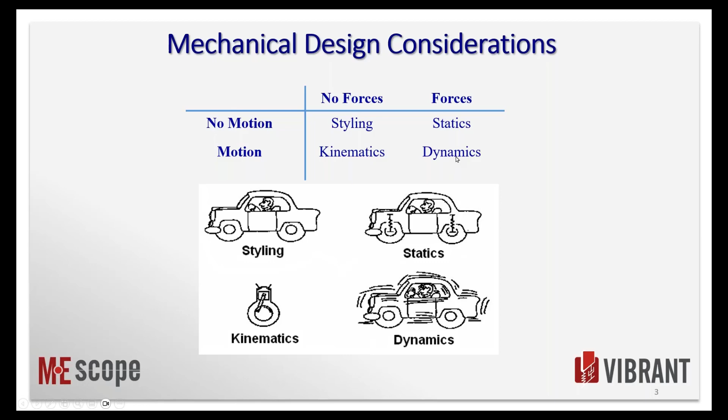Now, some of you might be familiar with FEA, finite element analysis. A lot of that work is done just with statics, putting static loads on a structure to see if it exceeds the elastic limits of the materials. And FEA is used - once you have an FEA model, you can solve for the modes of vibration, the dynamics of the structure, and you can simulate things and so forth.

So why is vibration analysis needed? A little bit of motivation here. The first three are more associated with what we call test and measurement, or product development, or installing new equipment or machinery in a plant. But uncomfortable to ride in certainly applies to cars and airplanes and tanks and other things. But if there's humans involved, then vibration may be excessive during the operation of the automobile, too difficult to control - again, a human being involved - or too noisy. And human beings don't like lots of noise, especially females.

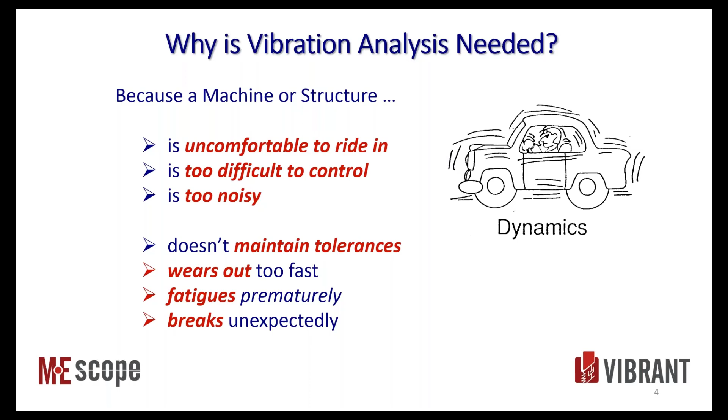The lower reasons are more associated with plant maintenance, and maybe many of you have jobs in the plant maintenance department of your company, and so your concern is more with maintaining tolerances if it's a machine shop, parts wearing out too fast, or fatiguing prematurely, or breaking unexpectedly. So those are all mechanical issues that can be amplified or exacerbated by vibration.

So what good is ODS analysis? MEscope from day one has been designed to show ODS data in animation with slow motion and amplified magnitude, so we can see what's going on. So once we get an animated picture of an ODS, we can, at least intuitively from the picture - our minds are very good at pattern recognition, not so good at computing numbers.

But when we take the numbers of an ODS and display them on a 3D model, or in this case, we're going to look at animations right on a video, on frames of a video. So how much is the machine moving? Where is it moving the most? What is the relative motion of one point relative to others. Now there we talk about phases.

So an ODS has phase in it, and that's often an important property of a machine to diagnose machine faults. If there's a difference in phase between the motor and a pump, that is often used by machine analysts to diagnose the problem. Maybe it's a coupling problem, maybe it's a soft foot - various problems that are associated with operating equipment in a factory.

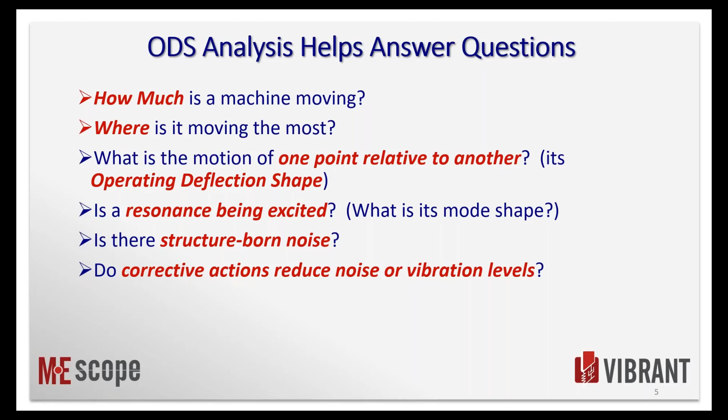Any structure with mass and elasticity will vibrate. This is the assumption behind FEA and Newton's second law, where we write differential equations that F equals ma, and the F part is what's called the restoring forces, the elasticity, the stiffness of the material, wanting to return to its non-vibrational position.

So we have to have forces in order to cause vibration. We may not be able to measure them, but with a machine we can't. It's distributed. We don't know where the forces are coming from. In a modal test, we typically create the forces either with impacting or a shaker, so we can measure the force and then measure the response and proceed with the calculation of that kind of data.

These last 2 are things that I've learned over the years that many people don't quite understand. All resonances are excited at all frequencies, and we have a couple of application notes that illustrate that. It depends on the mode shapes, it depends on where the forces are applied to the structure or the machine, and therefore, depending on the mode shape of a natural frequency resonance, it may participate in the vibration. So the last one: all vibration is the summation of mode shapes. When we get near a resonance, it tends to dominate the vibration, but again, it depends on the mode shape.

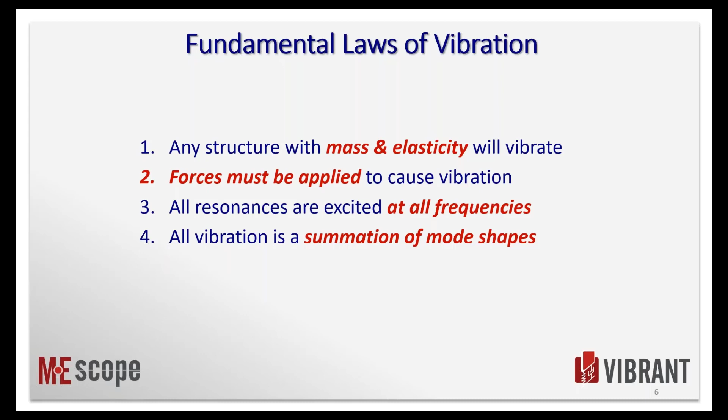So why use a cell phone? Everyone has a cell phone in their pocket, and a cell phone is a low cost and non-contacting measurement device. As opposed to an FFT analyzer or data acquisition boards in your computer or a multi-channel system, those are typically more expensive. With accelerometers and wires, now we're getting into many companies offering wireless accelerometers, still quite expensive compared to getting a picture like this of a machine from your cell phone.

And you can see there's a lot of phase here. The motor and the shroud over the belt, they're vibrating with a phase difference, and we can look at that. We can extract that directly from the time waveforms, and we'll look at that when we get into it.

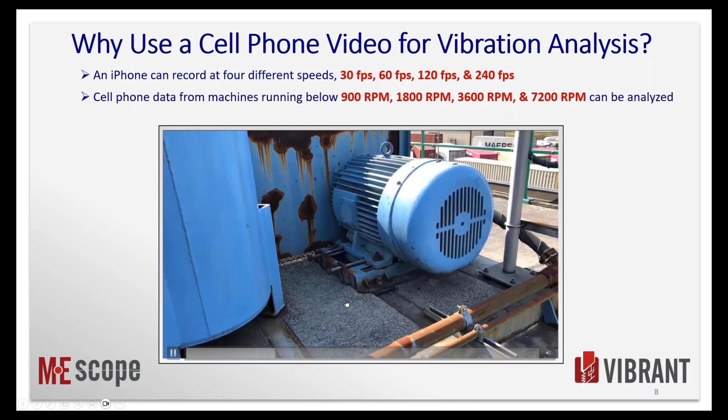Here's another picture. So if you're just called out as a troubleshooter into the field or the factory and somebody says this machine is just not behaving properly, well, a picture's worth 1,000 words. There's an amplified picture of what's going on with that motor, and it looks like the base of it is perhaps what we call soft foot. The base is just moving around quite a bit. Again, all these videos were taken with a cell phone.

Here's another advantage. Cell phone video can be recorded in a dark place. So many times in a factory, the machinery is off in a corner, it's very dark. Artificial lighting, jitter removal are usually not required.

Now, we have customers who try to use their video equipment, including cell phones or even a higher speed camera on, let's say, a ship next to a very noisy, vibrating machine. You have to deal with the jitter that's recorded in the video, and we have ways in MEscope to remove that. Lighting is always more difficult. You got to set up the lights, you got to have power, and so forth.

The algorithms in these cell phones, both the iPhone and the Google phone, they just keep getting better as time goes on to remove or take dark videos and improve the contrast, improve the light so you can see things better. Another issue is that they don't sample as high as a high-speed camera. So the electronics in a cell phone, because it's sampling at a lower frequency, gathers more light and the videos come out a lot clearer compared to a high-speed camera.

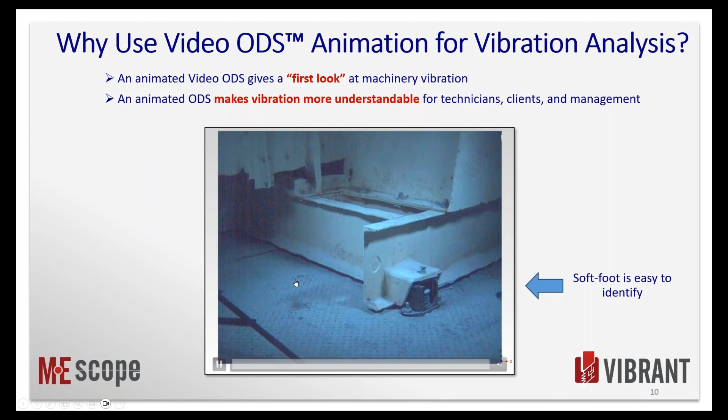So again, we can bring in technicians, clients, management and show them some of our results and begin to discuss asset management, what money is involved in fixing this machine and so forth. Here is a picture showing amplitude and phase in inches per second, displayed right on the video. We'll get to that as we get into analyzing some data.

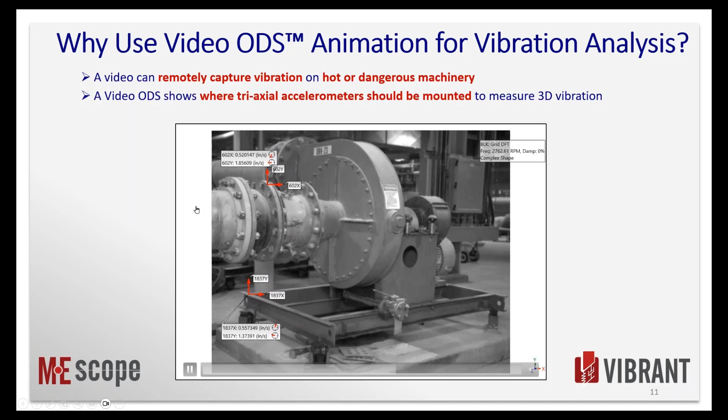I want to move along a little faster here because we've got a lot of ground to cover. But we can differentiate. The video itself is in displacement units, so we need to differentiate that data, and it's very simple in MEscope to do that in the frequency domain.

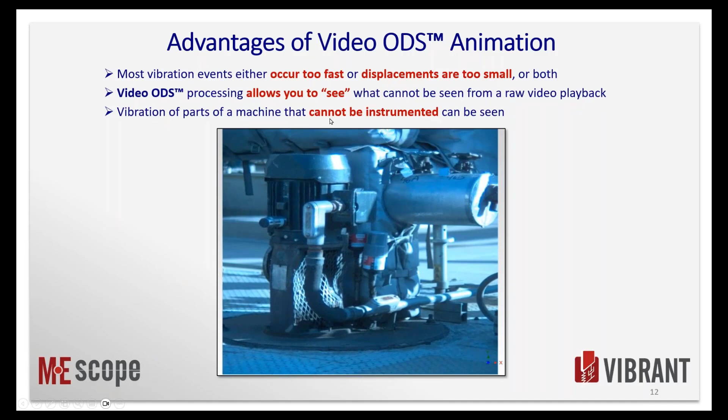Okay, so most vibration is either too fast or displacements are too small. Video ODS allows you to see parts of the machine that are vibrating relative to other parts that are very quiet and not moving at all. The other advantage is we can instrument parts of a machine that cannot be instrumented in any other way. You just can't put accelerometers everywhere.

Here's another example. ODSs can be recorded during normal operation. Many times production machinery cannot be shut down. The operations people are just going to say, no, we're losing money every minute, every hour the machine is turned off. But here's a clear case of one pipe vibrating and then another one is not.

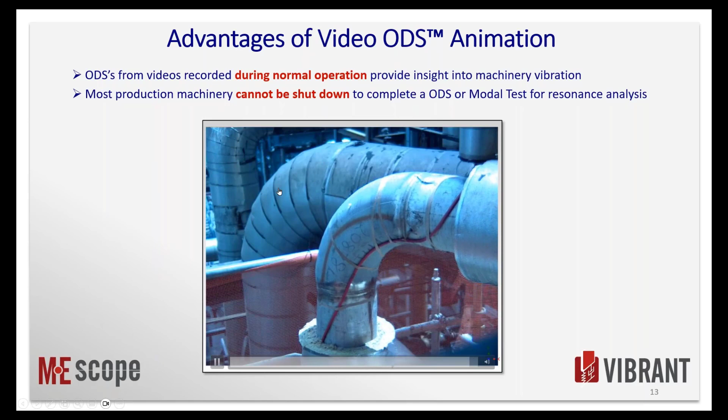Okay, operating deflection shape. This is another issue when you pay a lot of money for acquisition equipment. When I worked at HP back in the 70s, the analyzers were very expensive. One of the reasons why is that all of the channels of data have to be simultaneously acquired. So when I got accelerometers, in order to look at a mode shape or an ODS, they have to be simultaneously acquired.

Now there's other methods, you can use triggering and try to match up time waveforms with a trigger or a tachometer signal. None of that really is needed when you use a cell phone, because the cell phone pixels are not simultaneously acquired, but they almost are. And the phase difference between, let's say, the top of the video and the bottom of the video is so small, it's a matter of a few degrees, that for engineering work and most practical work, we can assume that the pixels are being simultaneously sampled.

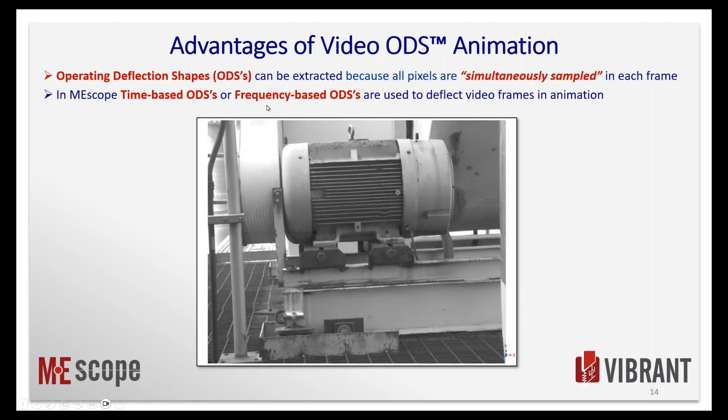So each frame of the video, we can assume every pixel, and typically in a cell phone video, we're talking about 1 million pixels. But once we've extracted the time waveforms, we can look at both what we call time-based ODS and frequency-based ODS. So we're going to get into some of that.

Here's another advantage. Once we've extracted the time waveforms from a video, we can apply signal processing just exactly the way we apply it with accelerometer data. So we can do time domain windowing to minimize leakage. We can do spectrum averaging to remove noise, and we'll go through an example of that.

So when we come out of the video, what we call the video processing in MEscope, we call it a wizard. We get DFTs, digital Fourier transforms, not spectra, but it is a spectrum, the transform. We can look at auto and cross, FRFs, which is very common with modal, coherence, which is common with accelerometer measurements, and ODS FRFs. So we're going to calculate some of them.

Now here's one of the drawbacks of a video. You can see here that there's a bright spot on this shaft, and as that rotates, the algorithm that extracts the vibration from each of the frames of the video is kind of paying attention to that reflected part of the shaft. It's showing a lot of deformation around that reflection that may not in fact be true in the real world. So that's something to be careful with when you have reflections off of a rotating shaft like this. That's not realistic. That's an anomaly of the video processing.

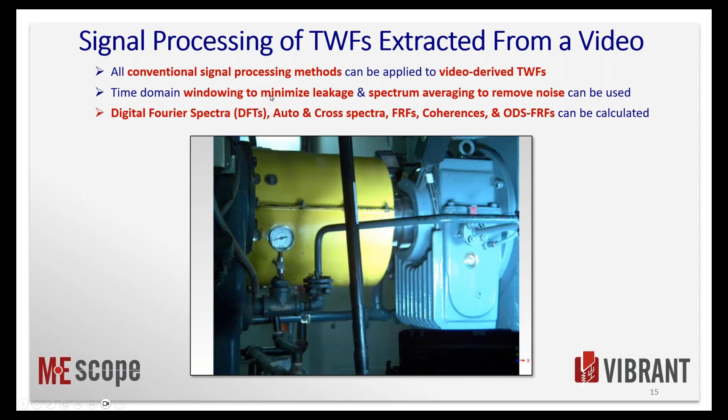Okay, let's go ahead and I'm going to bring up MEscope NXT, and you can see it's set up here for processing a raw video file or opening a previous video ODS project and doing some more analysis with the data. Over here I've got recent projects, so it's a little bit different layout. Again, the idea is you can run all this in a touchscreen environment. You'll see how much simpler it is, where you can just use a touchscreen computer and your finger instead of a mouse. Now I'm using a mouse, and I might even use a keyboard here a little bit.

Let me go back and look at one of the raw videos we're going to analyze here before we proceed. I'm going to go to the desktops and webinars and today's webinar. So here's a number of videos, and these were the ones we used for a tech paper that we recently submitted to an organization called IMAC, International Modal Analysis Conference.

Let me just show you that paper real quickly. We'll come back to it though. I'm going to open it up. The title of this is Using a Cell Phone Video and ODS Correlation. So very much the same topic of today's webinar.

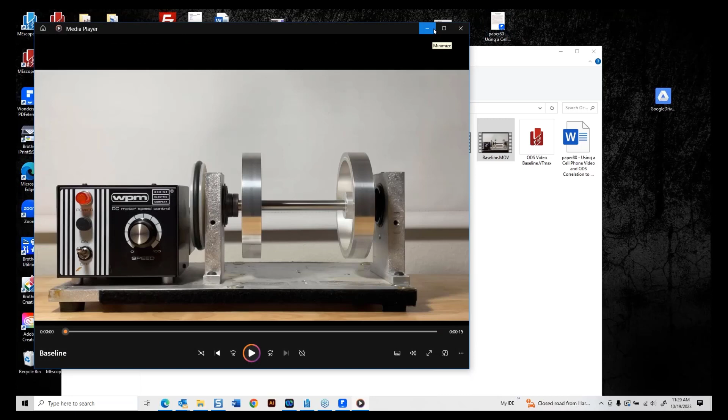Let me put that down, and let's go back and—wrong one. Let's open up MEscope NXT. Again, that stands for Next. It used to be called touchscreen version, TSV. We changed the name.

So this is what we call the wizard, and it takes us through a number of steps. You can see them up here: adjust and crop, frames and elapsed time, grid points, scaling distance, magnitude histogram. So these are the steps we're going to go through to begin processing this raw video in MEscope.

So let me open up the raw video. Here we are, looking at what we were just looking at. I'm going to click on the baseline MOV. This data was recorded with an iPhone, an Apple iPhone, and in the field you would connect your iPhone with a USB cable to your computer. In this case, I've already extracted all these videos from my iPhone, and they come in as a movie file, .mov, and MEscope can process that and a whole bunch of different video formats. So I'm just going to click on this one and we'll open it up. So there it is—there's a frame of the video.

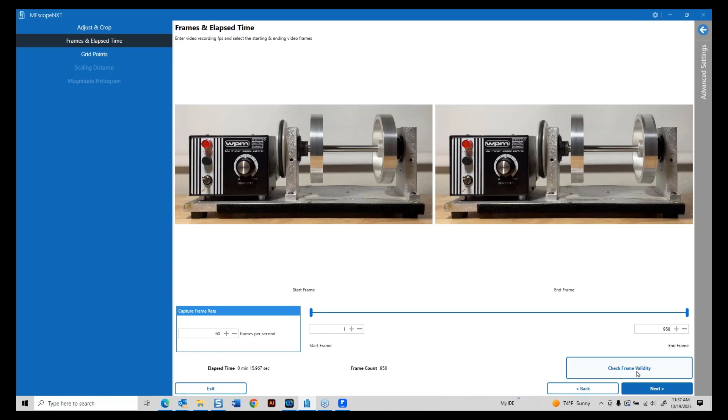That's the previous step, back to the frames in elapsed time. Let me move forward and just reset this down to something for today's illustration. We'll set it down to roughly 5,000. Now I'm going to extract and we'll see how long it takes, it's going to go a little faster. Okay, 4 minutes. So I knocked a couple of minutes off.

Now what it's doing is taking all 1,000 frames of the video and taking the time waveforms of the pixels surrounding each of these points in the point grid. So when it comes out of this process, I'm going to have about 10,000 time waveforms, which is a lot of data. And if I'm only interested in the vibration of these bearing blocks or the base plate, or if this was a motor and a pump, I might only care about a couple of points on the motor versus a couple of points on the pump, so I can compare those vibration levels with industry standard levels.

Again, anything vibrating over 1 inch per second is considered a lot of vibration by any maintenance department. And typically we want to see vibration levels below 1 inch per second on a machine. So we'll be able to look at all that here in a minute.

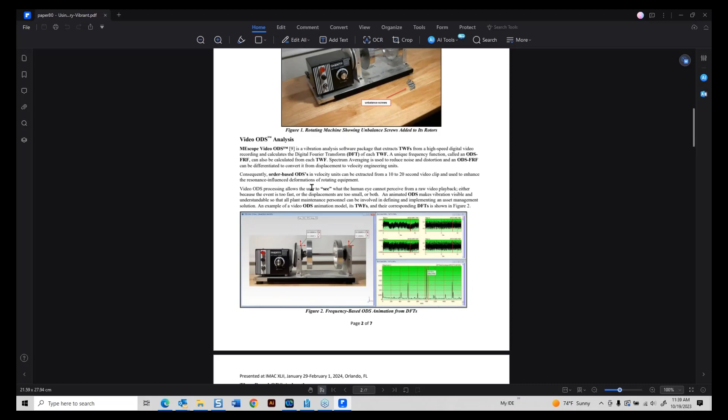So this is what we call video ODS analysis, and there's a number of things here. We've already covered a lot of that. We can do time-based ODS animation. We sweep through with a cursor. We can speed it up, slow it down, change the amplitude.

Typically in the frequency domain, we want to use sinusoidal modulation of the ODS data at the cursor. Here's a description. We're going to calculate some of these too. ODS FRF, a special calculation. And the reason we do this is we can differentiate this data from displacement to velocity units.

So now when we put a cursor on this data, we're actually looking at velocity. Now this picture here is showing displacement in inches. But what we're also seeing, and we'll see this in a minute with the ODS FRF, we'll see the running speed, approximately 1,000 RPM. Here is an alias second order at 1,500, and then a third order at 500.

So what do we mean by aliasing? Well, these frequencies are folding around the Nyquist frequency or speed of this machine, which is 1,800 RPM. Remember, at 60 frames per second, that's 3,600 RPM. This data here we're looking at in the frequency domain is 1,800 RPM.

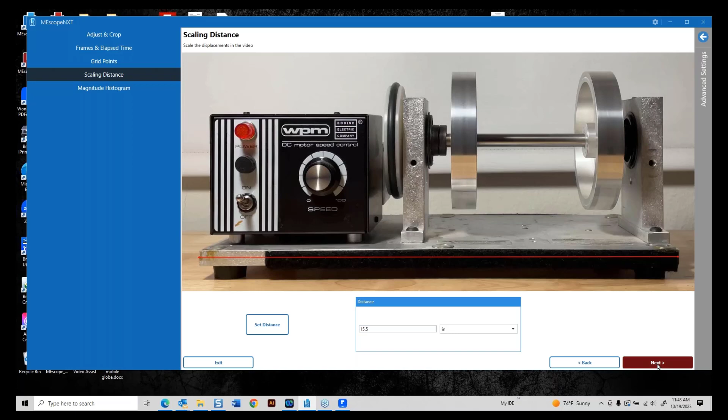We've done this, and we've got app notes and videos that show when we compare these results with accelerometer data, they come out very accurately. Now, in order to look at an animated ODS, I don't even need to do what I just did. I can just skip over that step, and the animated picture will show up just fine. It just won't be scaled.

Now, here is another step where I can reduce the amount of data. I said we're going to have 10,000 time waveforms and 10,000 DFTs, 10,000 ODS FRFs. It's a lot of data. Let's reduce it down a little bit.

What I'm going to do is use this magnitude histogram. Now that we've got the time waveforms, the software has organized them all from the smallest displacement to the largest displacement, and counted how many fit into each of these categories. There's 100 categories here. You can see they're bins. We call them bins. The last one is 100.

The first one, I've moved it from bin 1 to bin 2. So bin 1 is a large count of very small motion. When I moved and removed that and started bin 2, you can see that a lot of these points in the video have been removed, or in the point grid. Those are points that the algorithm that processed the frames of the video couldn't tell the difference from one video frame to the next, or it could, but those are very small motions.

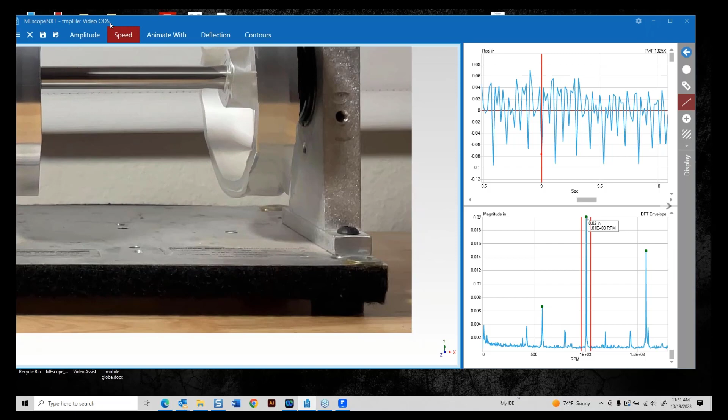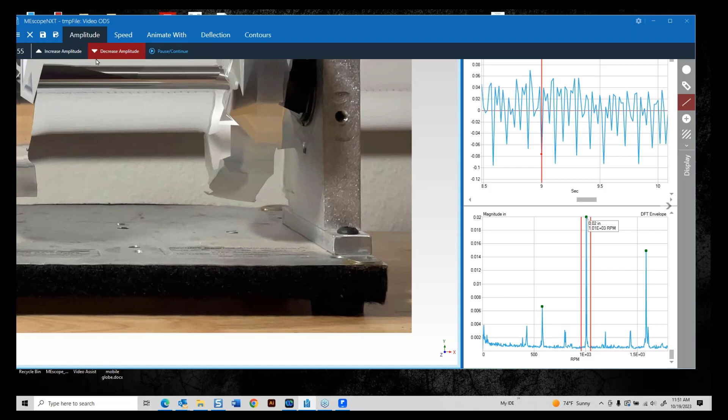If I crank the amplitude even more, we'll see that this thing is just—now this is the balance case, so we don't have any balance weights on here, but it's pretty quiet, which we'd expect for the balance machine. A little bit of motion there. Okay, let's just put this back so it looks a little more reasonable.

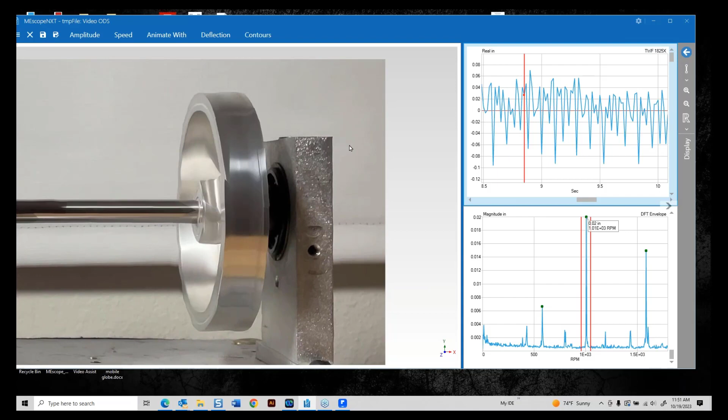Now again, these are not—if I come up here, these are each of the frames of the video, so we can see the motion there a little more clearly, and you can see some motion of the

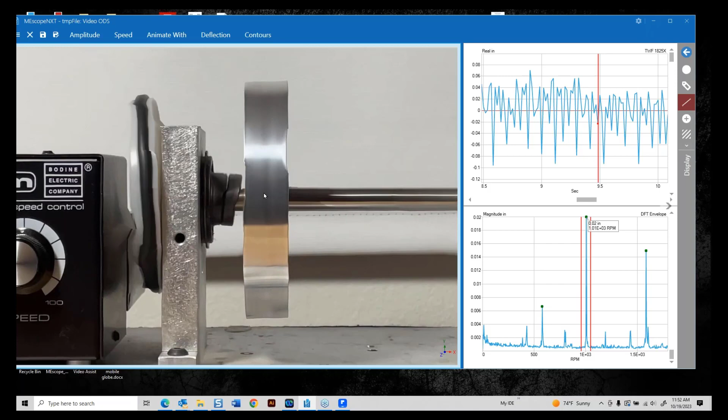bearing block. Come over here, this bearing here has got a lot of deformation going on, and of course the pulley also, and this inboard rotor has got some deformation in it also. If I go back here we're back there, we can see clearly the mode shape of that inboard rotor.

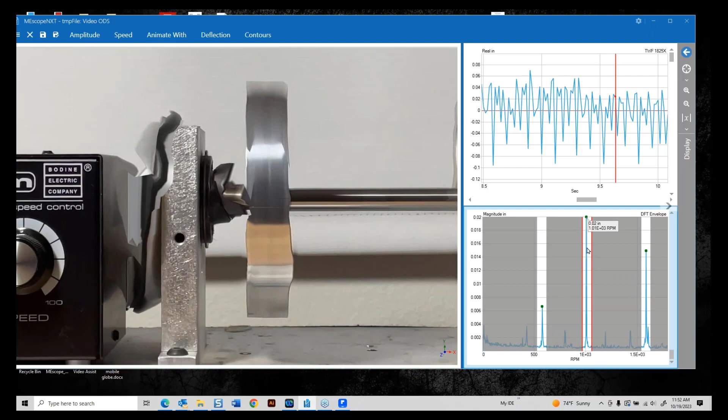Very typical, all vibration is a summation of mode shapes. There's kind of more of just a bending mode, and then I go to the running speed, and it's just kind of a bending mode. So anyway, you get a lot of useful information out of the video ODS.

Let's go now. Oh, a couple other things. Let me turn on a velocity cursor. So in the frequency domain, I can display data, so what it's showing me is the inches and inches per second.

Now, that's a lot of motion there. So where is that happening? Well, I don't know for sure, because this is an envelope—this is an envelope of all the DFTs. So a lot of them don't have much motion in them at all. There's the points of the structure that aren't moving much.

Let's go pick a few points on this model and display the magnitude and phase of those points, the deflection of those points. So I'm going to come over here, I'm going to go edit point graphics. So there's my point grid again. Now I'm going to go and say edit magnitude and phase labels. And so now I've got a little clicker thing down here, a little floating box, and I can just pick some points.

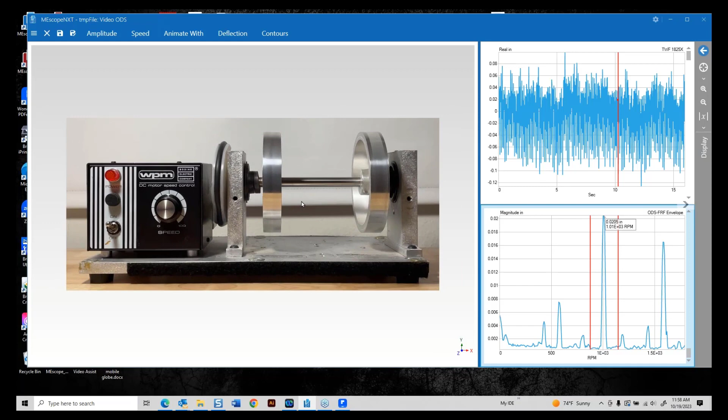Let me just go and turn that off for a minute. Turn off magnitude and phase. Okay, so we're scrolling through. Let me click down here and get the animation. Now we're animating from the ODS-FRFs. You can see it's in displacement.

Let me see if I can change that to velocity. I'm going to put a velocity cursor on there, and I'll hide that. You can see the peaks are a little wider. That's due to the flat top window, and a flat top window is typically a little more accurate in amplitude.

So again, if I'm looking for ODS data, let me turn on the aliased orders again. Same thing as we were looking at from the digital Fourier spectrum. We're getting the same kind of data from the ODS-FRFs, and I can drag the cursor over here and animate from each of these. It's a little bit cleaner. You can see it's just a very nice animation, and you can see the mode shapes there.

We can crank the amplitude a little bit, same as we were doing before. Look at how nice and clean the mode shape is of both of these rotors at the third order.

I think I'm going to stop right there, Mark, and ask if we have any questions that we can answer. There's a lot more to show in this software, but go ahead. If you have any questions, feel free to type those in. A couple questions that came in here.

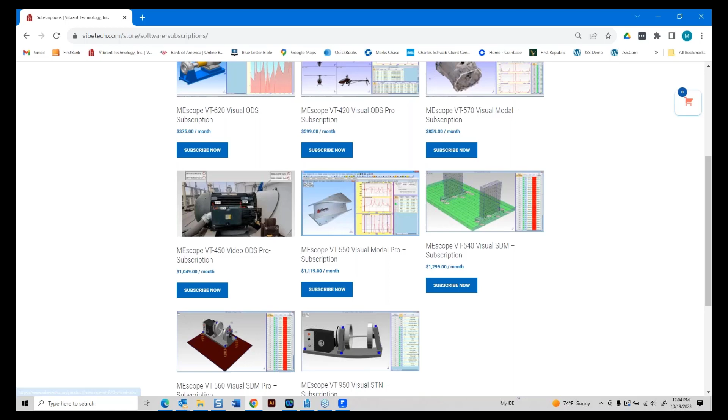Now what you'll get is both MEscope VES, which has a lot more tools for post-processing your data. But if you just want an animated picture, you can also download NXT from our website. Let me go back and see where that is—I guess that's under support, right? Downloads. So you can download NXT, there it is right there.

And if you have the license for what's called a VT450 package, that will allow NXT to operate, and you can use it on a touchscreen computer or desktop, whatever, and process your videos. One feature I didn't get a chance to show you is that we can unwrap around the Nyquist frequency, which is 1800 RPM when you record at 60 frames per second. You can go all the way to 240 frames per second, which is 14,000 RPM, and you can unwrap the spectrum in NXT so that you can look at orders between 1800 and 3600 RPM. That's going to cover a lot of machinery, a lot of mechanical systems, and that's why we promote it.

Again, you don't need floodlights, you don't need a big expensive setup. Now we offer a high-speed camera that'll sample at 1,000 frames per second. We don't manufacture them—we resell it as a kit with floodlights and stanchions and so forth for setting up the lights and the camera. So if you need to go beyond 3,600 RPM, you're going to need a higher speed camera with artificial lighting. But for troubleshooting, start with your cell phone—that's my advice.